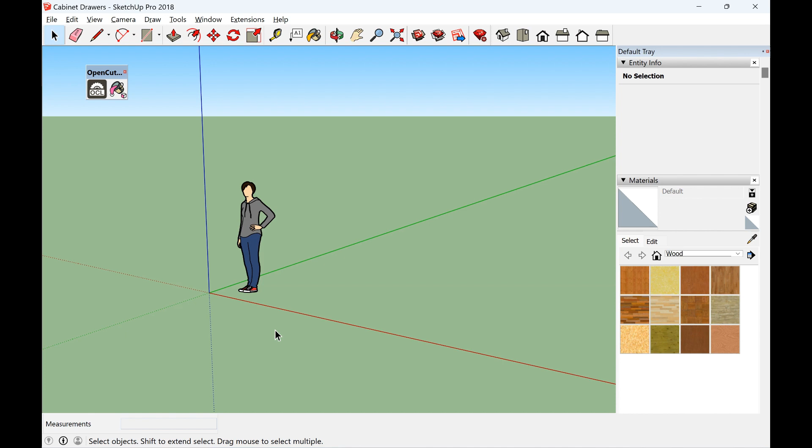Okay, so first of all, you're going to open up yourself a new file and save it, which I've already done. Then we come with the obligatory human. We'll get rid of her or him, whatever they are.

Now, I'm going to start off with building my carcass. So I'm going to start off with the base. So I'm going to select the rectangle tool and put it on here. Draw it out.

Now, all I have to do is plug in the dimensions that I actually want. So I want this thing to be overall 570 wide and 450 deep, but I've got a 12mm backing board going on the back, so I have to deduct 12mm off of that, so it's going to be 438. So we're going to say, because it's in meters, we're going to say 0.57 comma 0.438.

Okay, so that's our base. Now what we're going to do is select the surface, extrude it, just click on there and you can drag it up and down, and then you're going to type in the actual distance you want. So this is a 18mm piece of MDF, so it's going to be 0.018 thick.

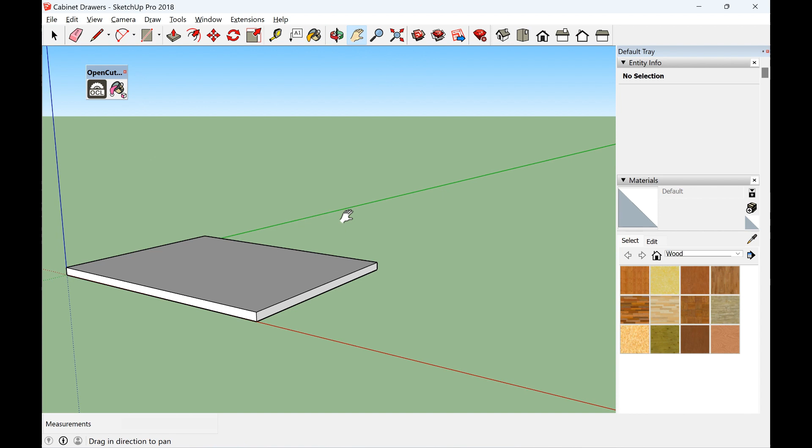Now comes the clever part, and I strongly advise you build all your models like this from the get-go. It just makes life so much easier, is to build things into components and groups, and that way you can just copy and paste things from different projects within the project. So I'm going to select that entire thing, and I'm going to right click, make component. So I'm going to call it carcass base.

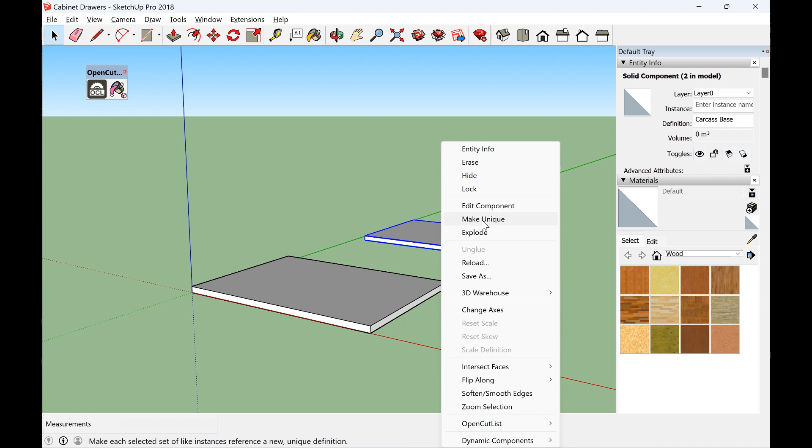Now what I want to do is make a copy of that for the lid, for the top. So we're going to copy, Control C, paste, Control V. Okay, but now I want to make that unique. Make unique. That means now it's not only is it not a copy of this, but it's also not a component. So now we can create a new component, but to make a component we have to explode it first, then we can make a component, and we're going to make that carcass top.

Okay, that's good. Right, now we want to make our side panels. So let's just get ourselves in the right view. Now, this is a good little bar. If you right click up here, you've got all the menus up here, and I use the views bar, which is really handy. Just make sure you click the right one.

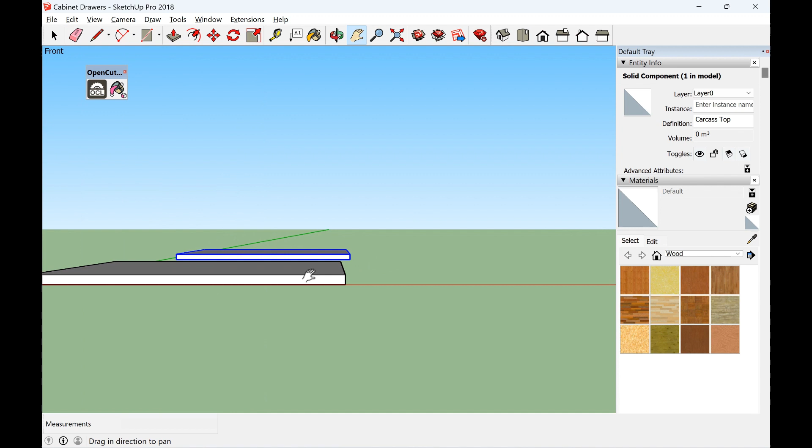Okay, so that's good. It just makes life easier, otherwise the computer may end up grabbing or putting you in the wrong plane. So I just want to draw my rectangle vertical now. And what I'm going to do is just hover over the corner point there and very gently try and keep it in a straight line, drag along, and you probably can't see it, but there's a very faint dotted line there, and what that means is it's pinning itself to that corner so that you stay in the right plane. Otherwise it might end up drawing it somewhere miles off in the distance. Okay, so I'm just going to start there and draw it out.

Now this one needs to be 650 high and 450 wide. So again, we're losing the 12mm on the back, so it's going to be 438, and the height I've got to deduct the two 18mm pieces of MDF, so I'm going to deduct 36mm off of that. So we've got 614 by 438.

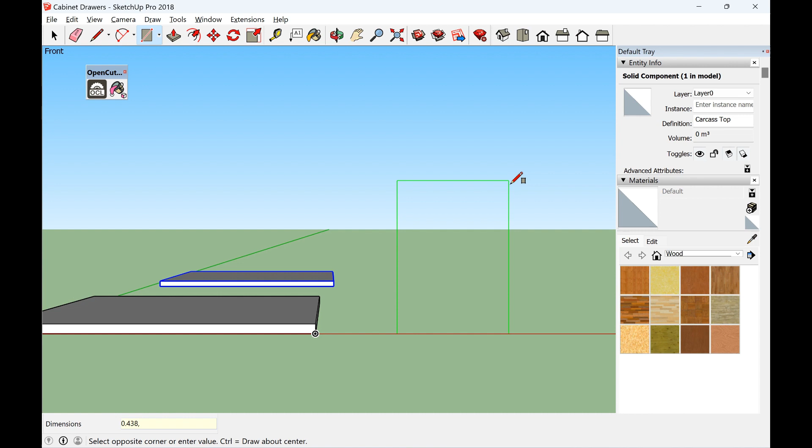614. Okay, that's good.

Select that, extrude 0.018. You can double click it to select it, or highlight it with the select tool. Then we're going to make a component, and we'll call that carcass side. Now, I'm not too bothered about making a separate one for the right hand or left, I'm just going to copy another one in there.

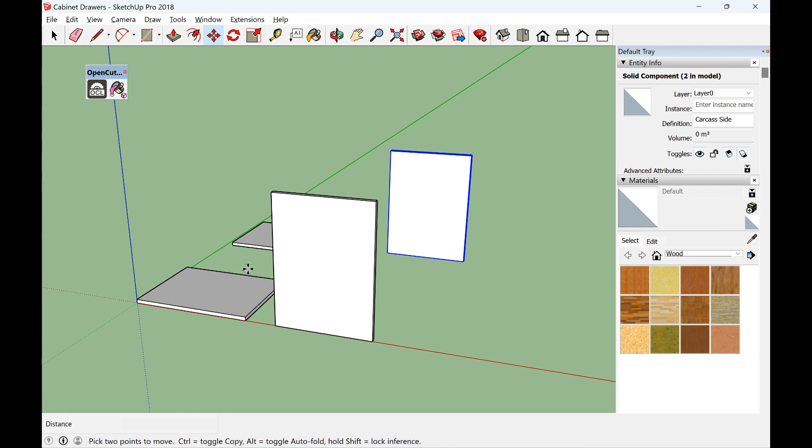Good, now we can assemble it. The way to do this is you're going to grab one of these pieces. I'm going to click the corner.

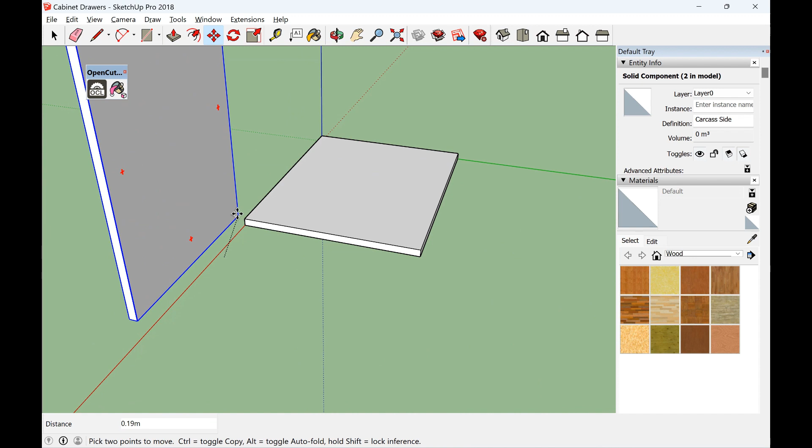Let's move it out of the way for a sec. I think we're going to rotate it first, that's probably the easiest thing. So click the rotate tool. Now you need to, as you hover your mouse around, you see it changes planes all the time, so we want the blue one because we want it in the flat plane. I'm going to click on the corner there, draw a line out parallel to the unit, and then swing it round to 90 degrees and it will snap on the 90 degrees. You see where it goes green, that means it snapped on the 90.

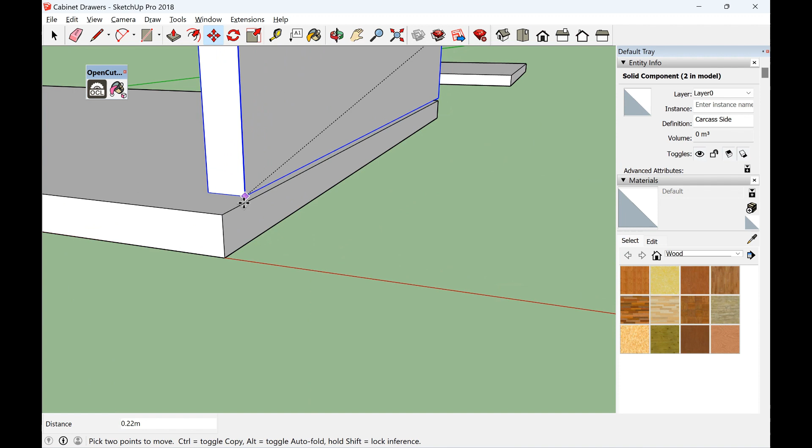Okay, now this makes it a lot easier to place onto the other unit. So we're going to scroll around, get our move tool, grab the corner, zoom in and pin it to this corner. Okay, and then we're going to do this one.

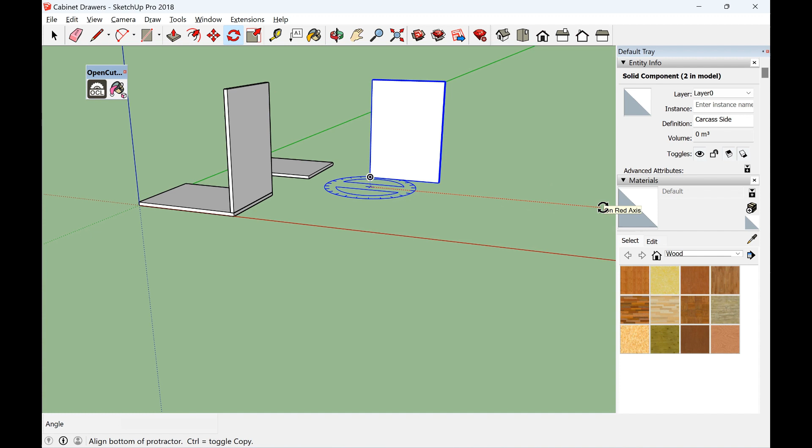I find if you just hover over and then just pull it down slightly, you get the blue one. Doesn't actually matter, it's not on the unit. So there we go, snap to the 90. There's several ways of doing this.

Just going to rotate that around so we can see more easily. Then we're going to get the grab tool, grab the corner. There you go. And then we're going to grab the top, the lid, and pop that on top there. Okay, so that's our box.

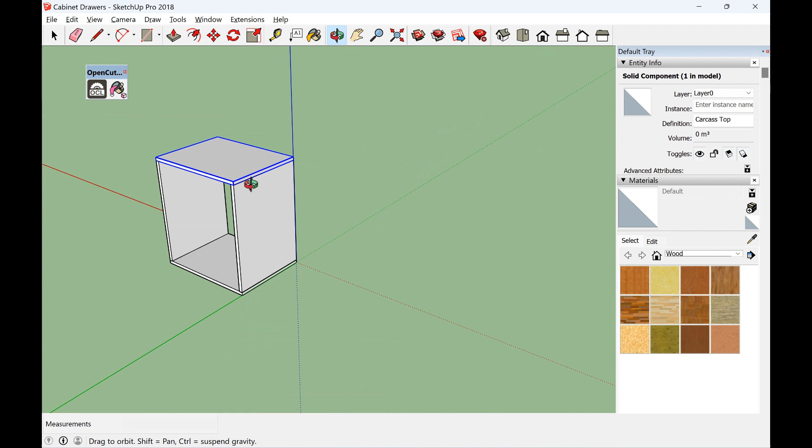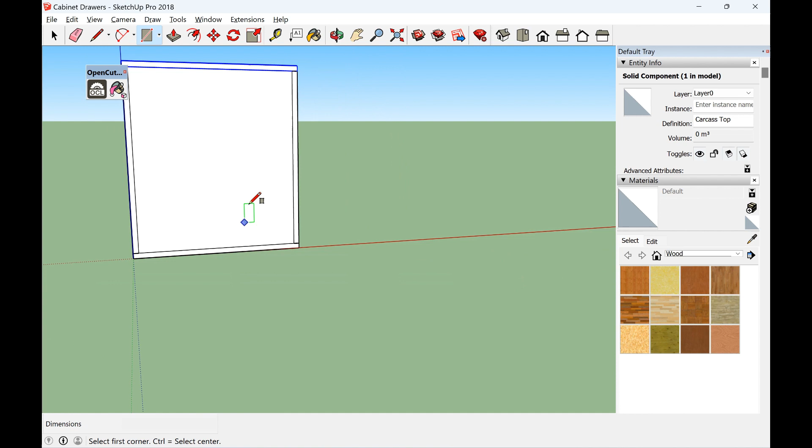We need the back for it now, the 12mm back. Now you could just draw yourself a separate 12mm back, but I'm going to show you another way to do it. So we're just going to come to the back here and draw a rectangle on here. Make sure you click the right one, you may have to zoom in. Okay, there we go. So now we want to extrude that out.

0.012, 12mm. But you must create a component now, because otherwise this is glued essentially to the main carcass, and then it will end up pulling it in different directions, so you don't want to do that. So just click it several times, right click, make component: carcass back.

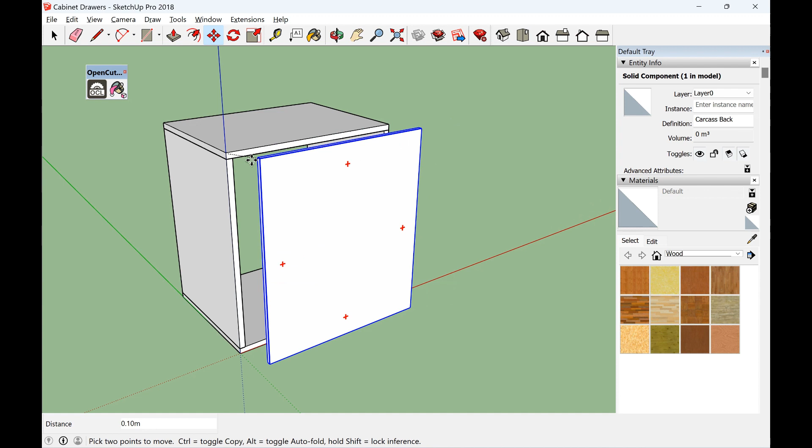Okay, so now if I want to, I can move it. If I hadn't done that, created a separate component, it would be dragging parts of this thing off in all sorts of directions. So you don't want to do that, so let's just escape that and leave that. So that's our carcass now.

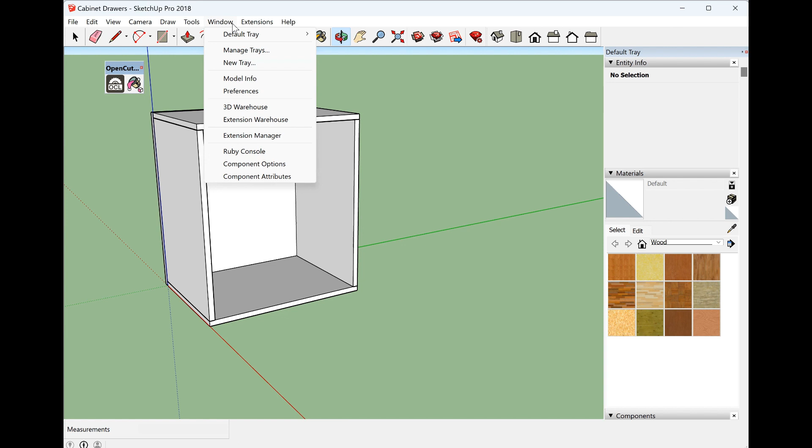Okay, I thought now would be a good time to show you how to change the precision of the dimensions, because it's becoming a bit of a pain now for me. So we had it set like this. If we take it to one extra decimal place, we'll now get all the millimeters. So that's under Window, Model Info.

Okay, so now, before we decide on what drawer runners to get, we need to measure the depth of the unit. So we're actually getting now 420, 420 millimeters. So we need to find something that's that or less.

Okay, so let's go online now and see what's available. Now, before we decide on which drawer runners to get, we have to make sure we get the right length. Now, they don't come in very specific derivations, they'll usually be 100mm lengths, or maybe 50mm half lengths of that. So it might be 350, 400, 450, something like that. And because we've got a length of 420, we're going to be looking at a 400mm length, as long as you can get in that space.

Now, these ones are the creme de la creme, really, of the drawer runner world. They are soft close and ball bearing. You don't have to have soft close, or self-closing, as well as another feature. I do tend to find with these, if you're cutting a lot of MDF dust, you must keep it clear of these, otherwise it really affects the ball bearings. So you've got to keep them super clean. So they are a little bit finicky, but definitely the best quality.

Okay, now let's have a look at these undermounted ones, so you don't have to have them on the side of the drawer. They could be mounted on the base.

Then we have some very basic ones. You can get them even cheaper than this. They don't have soft closes, but they are metal ball bearing runners. They run on the sides of the drawers.

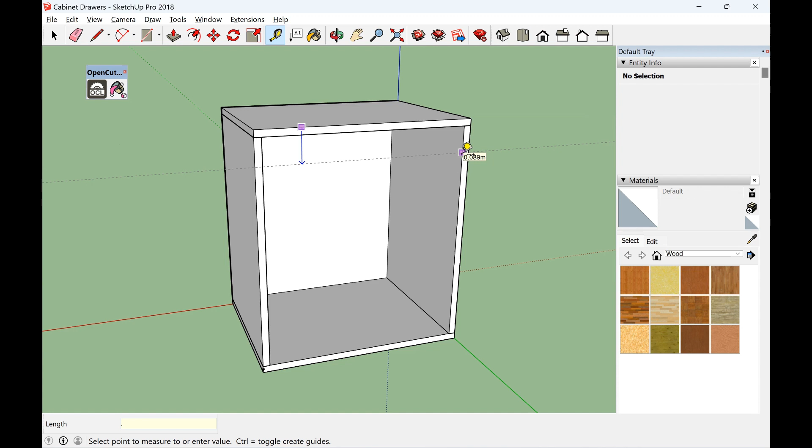I'm going to type in 0.01, and that will do my first guideline, and then one at the bottom, 0.01.

Now there is a function in here that allows you to divide up equally between two points, say for 3 drawer fronts, but then I found it difficult to manage to achieve a 5 millimeter gap between the drawer fronts. I can't explain it in too much detail, but it's probably easier for you, especially the first time, to just attempt it this way.

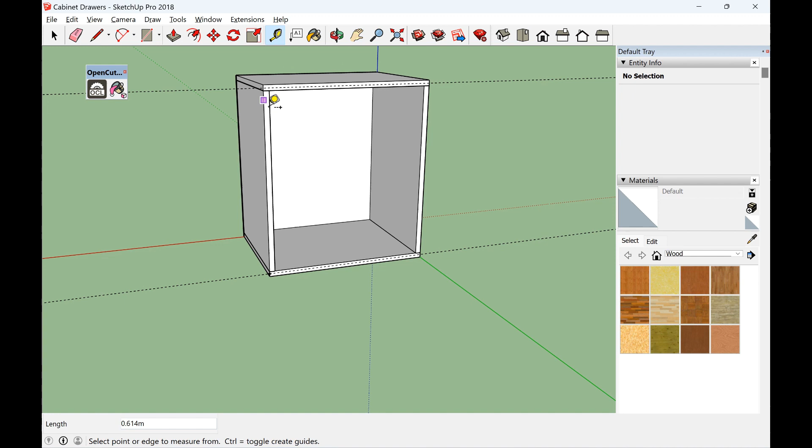So all we're going to do is measure the distance between the two guidelines, which is 630. Now we need to deduct the 5 mil and 5 mil gap between the 3 drawer fronts, so that's 10 mil off of that. That's now 620, but I can't divide that in my head - it'll be about 207 or something. So divide that by 3. Yeah, 207 millimeters.

Let's drop a guideline down, making sure it's again on the surface, 0.207.

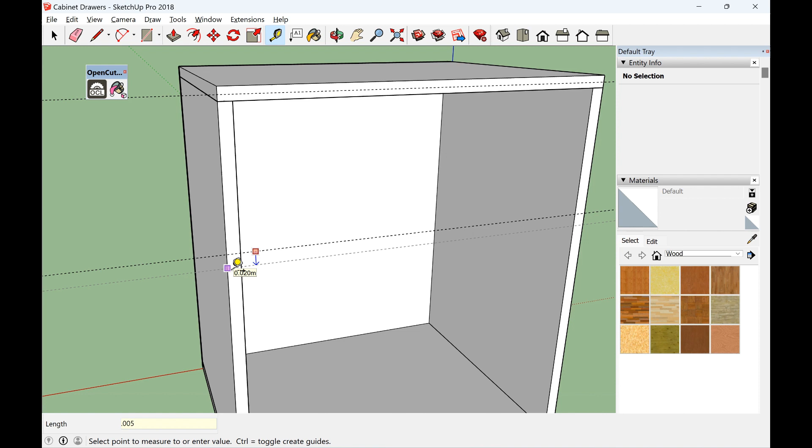Now I'm going to create my 5 mil gap between this drawer front and the next one. Always have to make sure you're grabbing the right thing. 0.005. Then let's drop that down another 0.207. Move down. 0.005.

Okay, so now the critical thing is whether or not this is actually 207 or close to it. So it's 206, that's because we lost a little bit - it wasn't quite 207, but I can live with that, 1 millimeter difference.

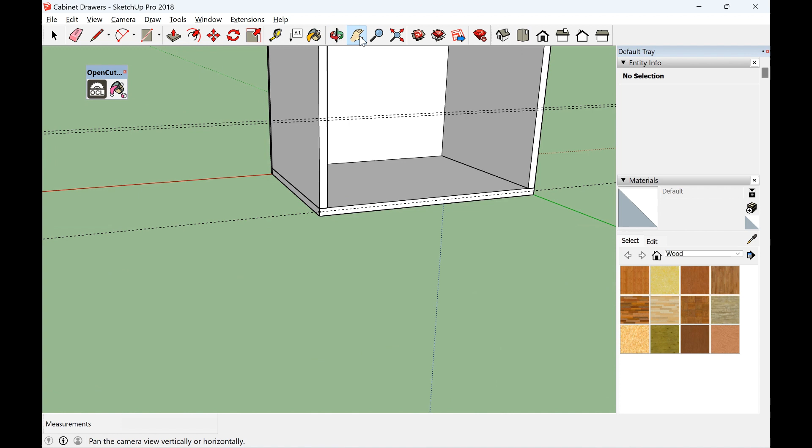Now what I want to do is, I think what looks quite nice - the 5 millimeter gap is good. That's small enough that it looks nice and clean, but also gives a big enough gap that the drawer fronts are not likely to rub on each other if they're slightly out of line. And some of that we've taken up with paint anyway.

And on the sides, I think 3 millimeters is a nice offset. So we've got to somehow grab the side and put in 0.003, and then this side, 0.003. Nope, didn't quite do it.

0.003. Has it done it? It's not - this is the thing, you've got to make sure that it's actually grabbing the right part. So I'm going to turn this around this way. It's gone inside the unit.

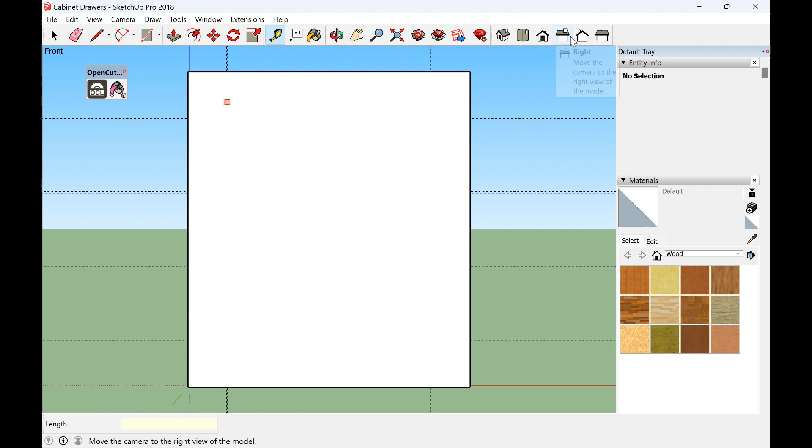Okay, that's on the surface, 0.003. Okay, there we go, that's better. All right, let's look at the front of it. Yeah, okay, so now I'm going to be able to draw my drawer front. Make sure it's grabbed the right part.

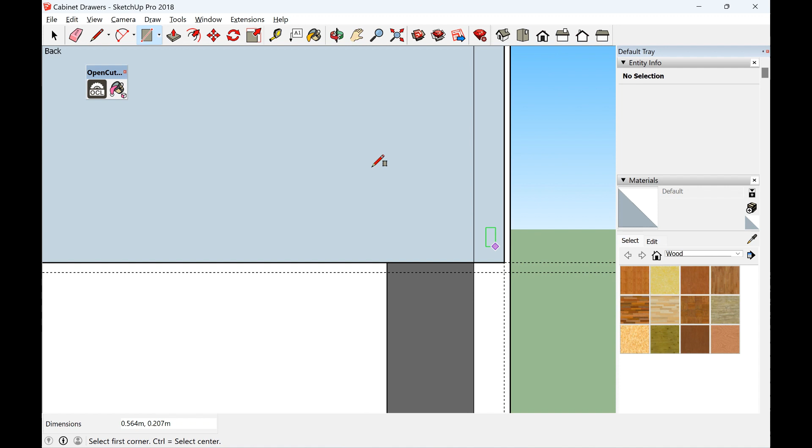Move it over. Go back to the rectangle tool. So now we've created our drawer front. Click on it, rotate, so we can see what we're doing.

Extrude - it's going to be an 18mm bit of ply again, 0.018. And then we want to create that as a drawer front, as a component. So this is going to be drawer front. And then it's probably just easier to go now down to your components and grab the drawer front. Not Stacy - right, drawer front.

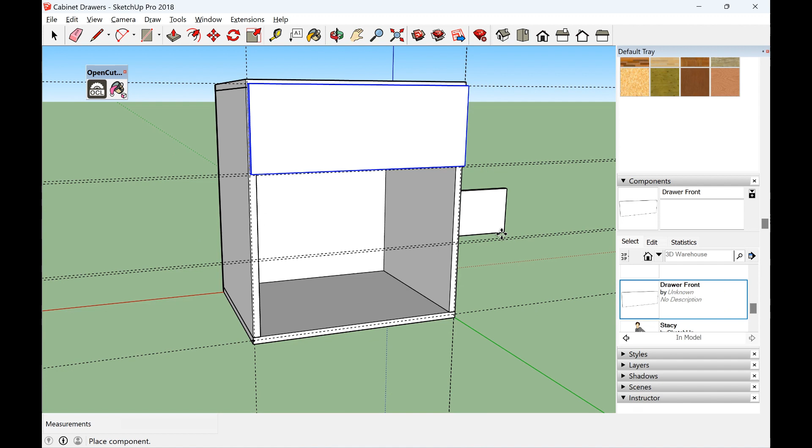Okay, I need to see where it's grabbing it. So I just put it in place and then we're going to position it up. So it's still selected - let's grab the corner and put the corner right there.

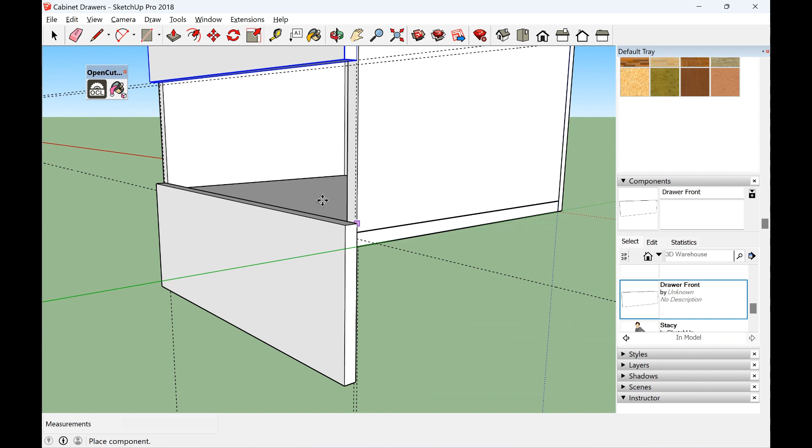Okay, another one. Grab the corner, zoom in, make sure it's on the right point. And there we go. Those are our drawer fronts.

So let's group those together, which means we can move them all out at once. No, just keep it on that line, just makes it easier when you put it back.

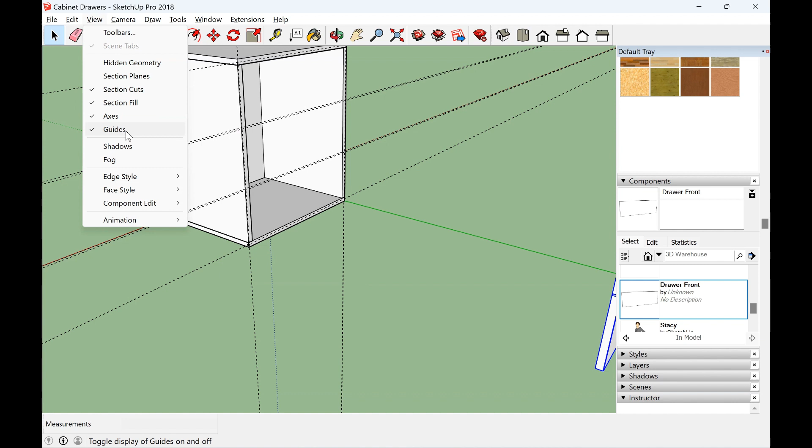Now I want to hide the guidelines, so just go to View, scroll down and you see Guides. So I've hidden that now - so they're still there, but they're just hidden. Let's also make a group for this carcass. Make a group.

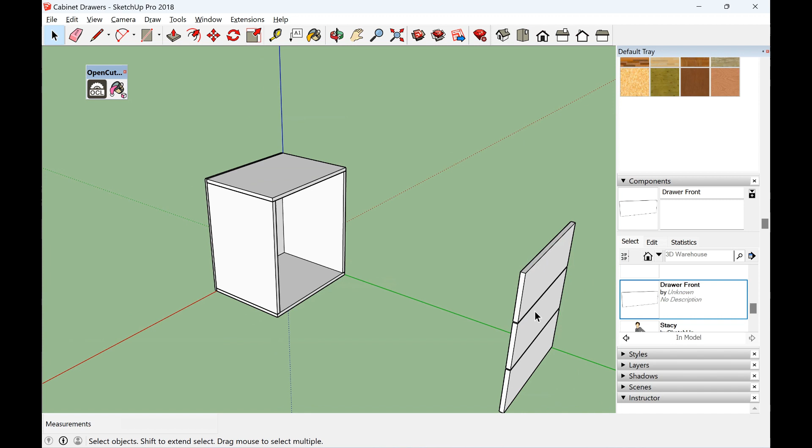Okay, so now we can start building the drawer boxes. Before we go any further, I have actually made a slight mistake, but it will be a learning process for you guys. So you know how I said that I wanted to draw my drawer fronts on the front there?

Well, that's because they're going to stop on the face of the unit, and I didn't allow for that 18mm in the depth of my overall unit. So now it's 18mm too big.

But that's fine - you're going to learn now how to reduce the size of a component if you've made it too big. And just one point about making the drawer fronts finish on the face of this unit: it gives it a nice positive stop. You can't really go wrong with it.

If you start trying to do inset drawer fronts, it's a lot more work because you have to make sure it all lines up perfectly. I certainly would suggest for your first project you keep it simple like this. And to be honest, I want to do this project as quickly as I can, so I don't want to get involved in that. And I'm happy with the look of the drawer fronts finishing on the face.

So how do we do this? Right, let's zoom in, move it over.

Now the only downside to having all individual components, which helps you with producing a cutting list later rather than making one big box, the downside is that you then have to go through each one and make it smaller, but it's not an awful lot of work.

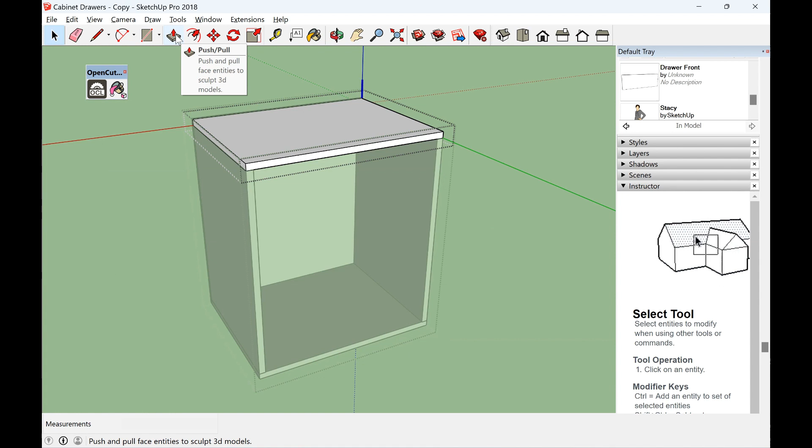So just click several times until you've isolated the individual part. Now we're going to extrude it in reverse. And even though down the bottom here it says distance, it said minus point whatever, you're actually going to type in a positive one, so 0.018. I know it doesn't make any sense because you want to go in that direction anyway, but it does work.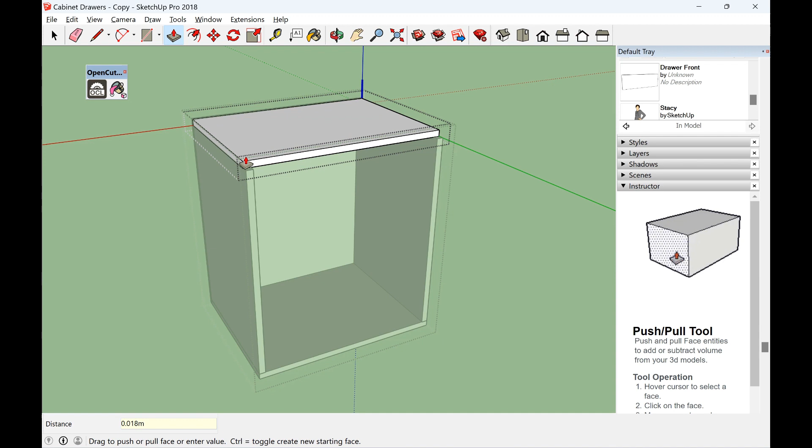Okay, so in hindsight now, maybe I shouldn't have made the top and bottom different - I could have affected both of them with that. So that's what I'll suggest to you, make them the same.

Haven't quite got it yet, there we go. 0.018, so that's the thickness of the drawer front we're removing. But the sides should move back together - there we go, because they're the same item.

Now what you can do, rather than type in, you can snap to the face of the unit. There we go - so let's just double check that.

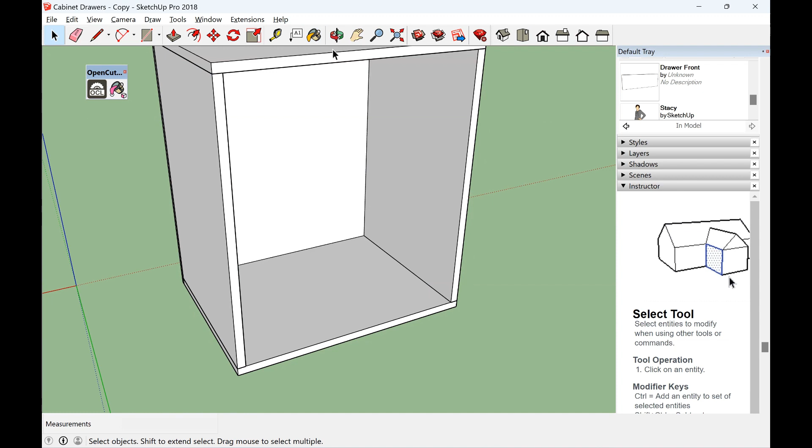So this plus 18mm should make 450, which is what it does. Perfect, okay, let's save that.

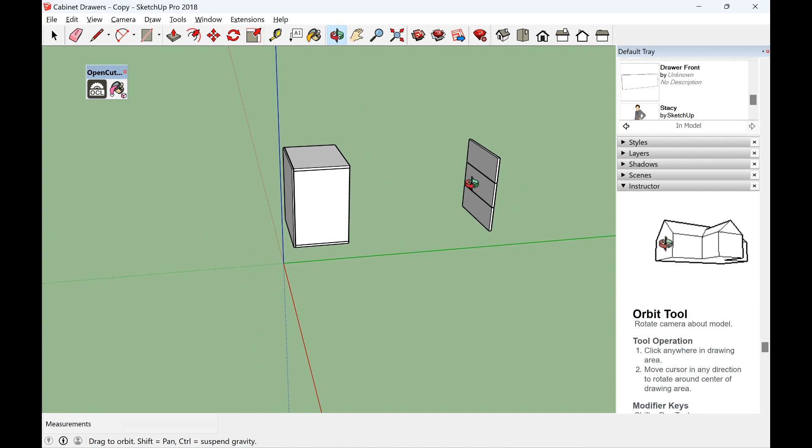Right, now we come to the complicated part. Drawers are actually pretty complicated for what they are when you're designing them from scratch. They look simple, it's just a couple of drawer runners on the side, but to make them all line up, you've got to do a lot of planning to make sure it all works, otherwise you'll get binding drawers and it just won't work.

So let's start off with this bottom one. What I'm going to do is work out what the width of my drawer is going to be overall. So let's go back to the unit, just to double check our dimension: 534, as I said.

Now my drawer runners, I'll show you now, are 12.7mm - we saw that in the ad anyway. So 12.7mm. What you want to do is allow 1mm wiggle room either side, so that'll make it 13.7, round it up to 14, double that, 28mm. So we've got to take 28mm off of the width of that opening, so 534.

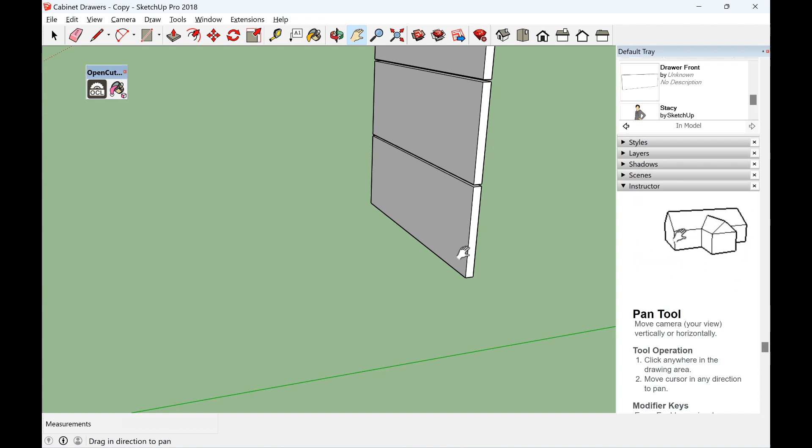So 534 minus 28 is 506. But we can do it in from the edge of this unit. This unit is 15mm overlapping on the edge of the unit. If my maths is correct, so we want to come in 15mm plus the 14mm, so 29mm, and that will give us the outermost face of the drawer box: 0.029. So that's taken into account the amount of overlay on the side of the unit and the thickness of the drawer runner with a little wiggle room.

So then we do the same on the other side: 0.029.

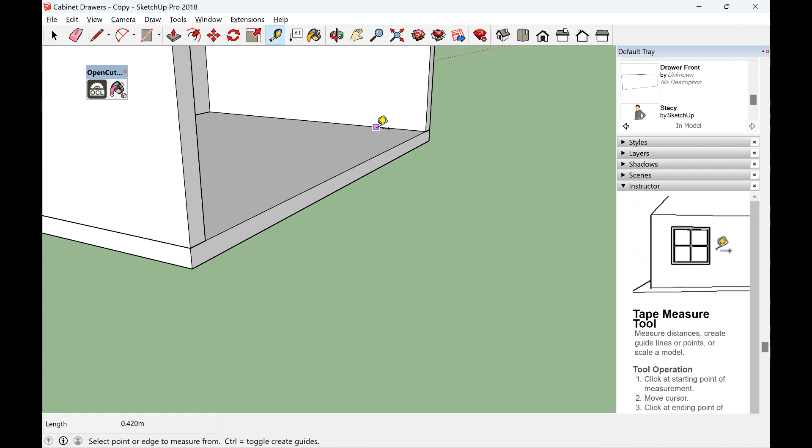Now from the bottom, I want the drawer runners to start 10mm - I'm trying to get it as low as possible, but I give myself a bit of wiggle room. I'm going to start them 10mm from the bottom of the carcass. So if we go back to the carcass, I want it starting - the bottom of the drawer runner and the drawer 10mm from there, from the base.

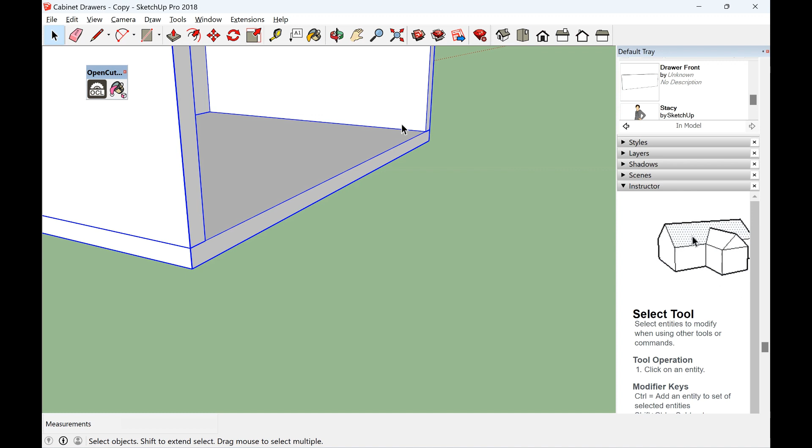But also we've got to work out off of where the drawer front sits, which we said is going to be 10mm off of the floor, so it's going to be 8mm to that lip there. So 8mm plus the 10 is 18. So let's do a guideline of 18: 0.018. So that's going to be the base of our drawer.

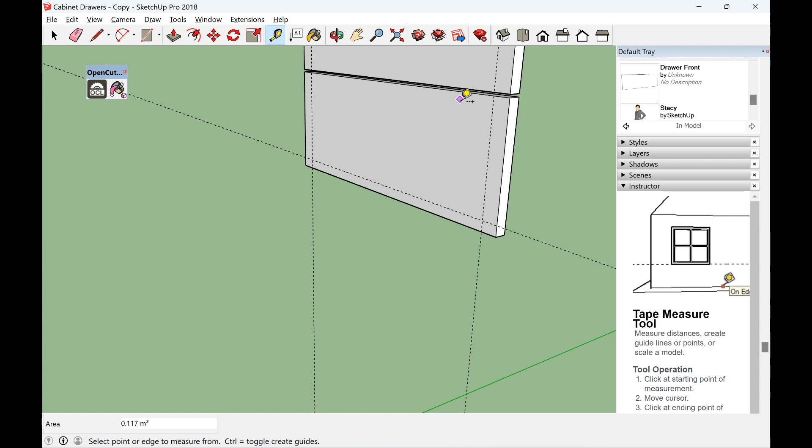Now from the top, I really want to maximise the depth of these drawers. That's one of the big reasons why I'm building the drawers, because you can never seem to get deep drawers these days - they're always really shallow and stuff falls out of them. So I'm going to go for - I know my drawer runner is going to also sit, let's just mark the other 18mm on. And we know where the base of our next drawer is coming.

That's obviously the wrong part of the drawer, just have to rotate it a little bit. And it's clicked on the wrong thing again - you've got to be so careful with this, it pays to zoom right in. There we go.

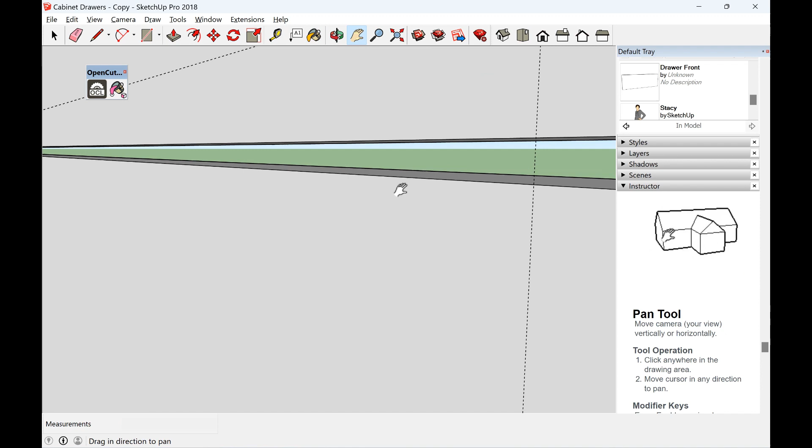So let's make that 0.018, so it's identical to the one below. Now I know that my drawer run is going to start way up here, so I've got plenty of room, but I'm not going to take the drawer all the way to the top, just for aesthetics. I'm going to drop it down, and make it 15 mil down. Okay, so that is the externals of my drawer.

Now if you look at most drawers, they usually have the side panels longer. So the side panels that extend front to back are longer and cover the edges of the front and back panel. The reason being, well one of the positives is that if you imagine you're going to screw it or nail it from the side, therefore you're going to be pulling across the screw.

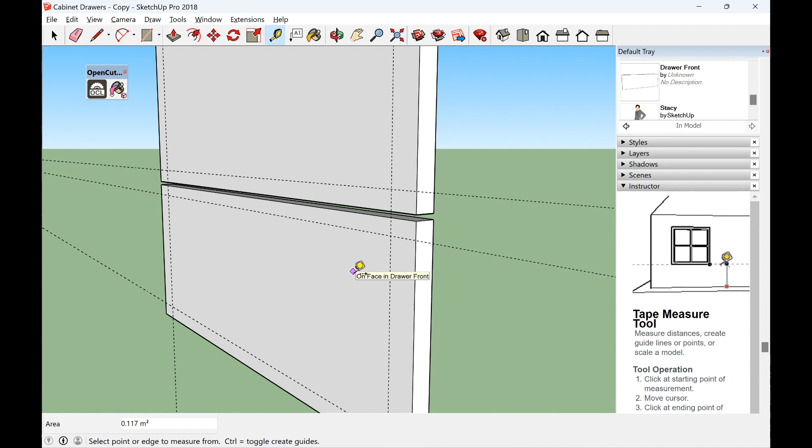The particular problem here is because you're going into MDF, and if you're constantly tugging on that, you could easily wear it out eventually and pull the screw out. So it's always better screwing from the side when you're doing it on a drawer. The other reason is that you're going to hide the end grain of the front and back pieces.

Now the other question is, do you just use 3 sides to a draw box and then stick the draw front on? Because now you're losing another 18 mil, you're making a 4-sided draw box and then sticking the draw front on. But it is so much easier to assemble, and 90% of drawers out there you'll see will be like that. So I would advise you to build the draw box.

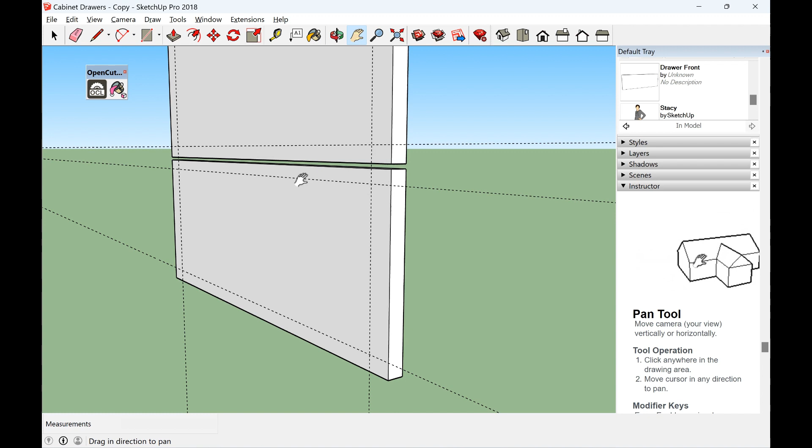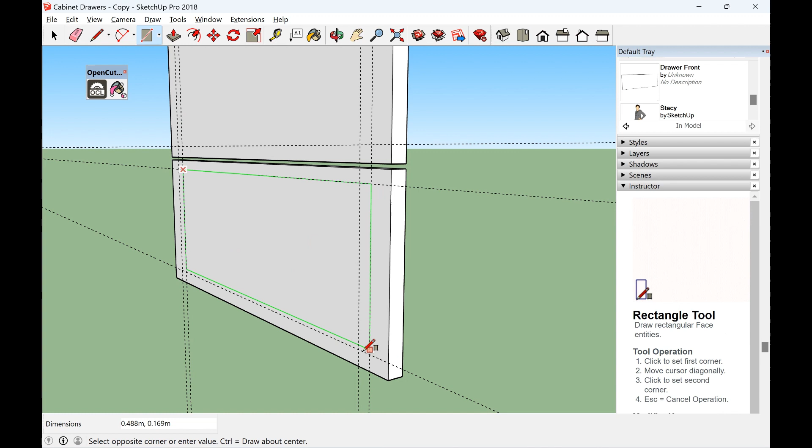Again, if it's your first attempt, just build a draw box and then attach the draw front to it. So what that means is we need to bring another guideline over at 0.018, and again another 0.018. That's going to be the sides of our unit. So let's use these guidelines now and draw the front of our draw box, and then we're going to extrude it 0.018.

Now let's make that a component. You make that drawer box front or back. Great.

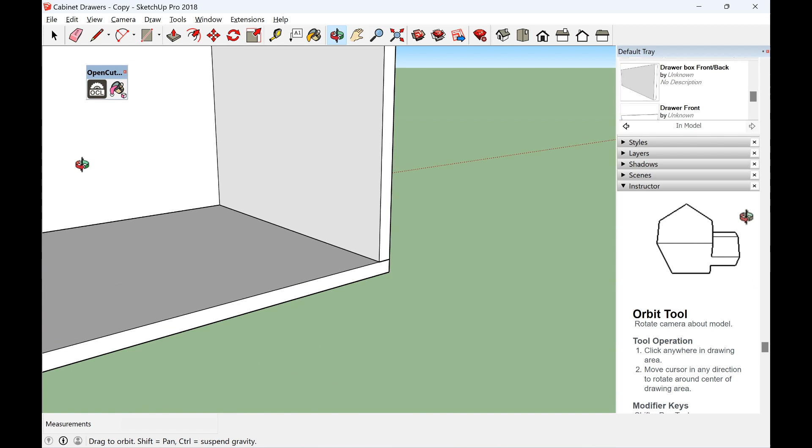Now the depth of the draw unit, the draw box, it could be the full depth, but you don't know how accurate - it's highly unlikely you're going to build it exactly accurate. Even someone like me, I'm going to struggle to build it 100% accurate. So I'm going to allow myself 10 millimeters at the back. Our depth is currently 420, so I'm going to make it 410.

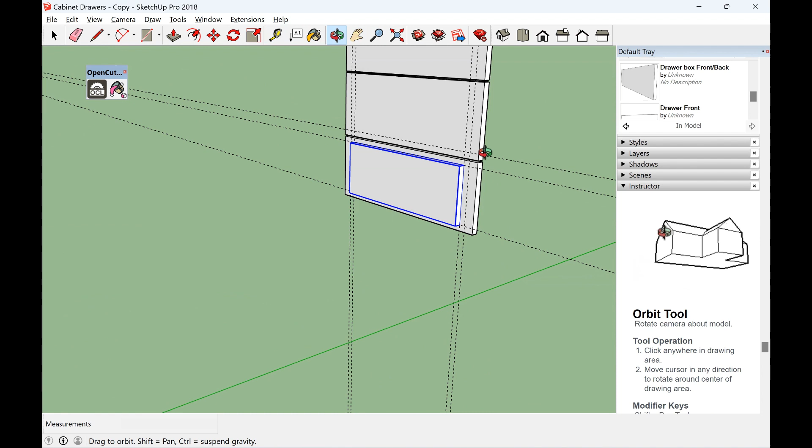And I can extrude that. More than one way to skin a cat - I'm just going to do it this way myself. And then we extrude that 0.41. Enter. Right, there we go.

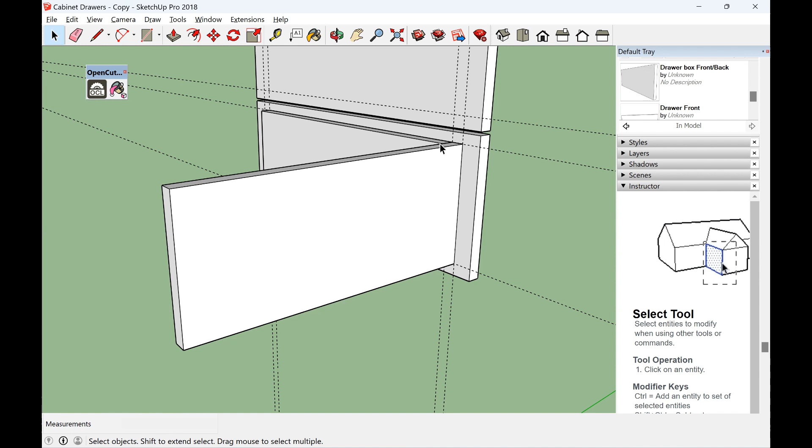That's the drawer side. You see there, it's hiding the end grain of that front panel. And if you had a screw in there and you're pulling the draw that way, you're pulling across the screw in shear strength rather than pulling against the screw. I mean, screws are strong, but eventually, especially in MDF, they can become weak, and if you keep tugging on it really hard, you'd end up pulling it off.

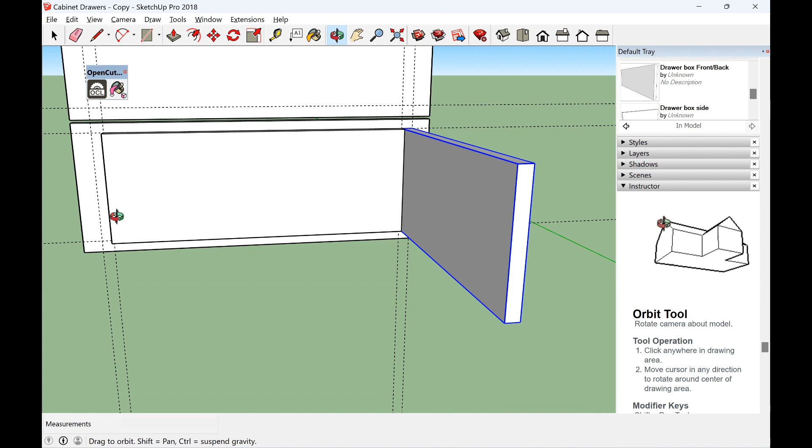So that's what my mum said anyway. Right, let's make this a component - drawer box side. Rotate around. Then we can go to our components.

Just a little note about components: if they're not here, just click on this little arrow and go to in model. Sometimes there'll be all the generic components from elsewhere, but I want my drawer box side. There we go. And I can place that right there. And then drawer box front and back. Done. Okay, so that's our drawer box.

But what we're going to do about the base - now this is where it also gets a little bit complicated. You need to decide what use is intended for this drawer, how much weight you're going to be putting in it, and what materials you're going to use. Now I'm using MDF. MDF has got lots of pros and cons, but the pros are it's cheap, and I've got some in my garage that I want to use up. So if you're using ply, it's much stronger - you can get away with much thinner stuff, and this really dictates what you do with your base.

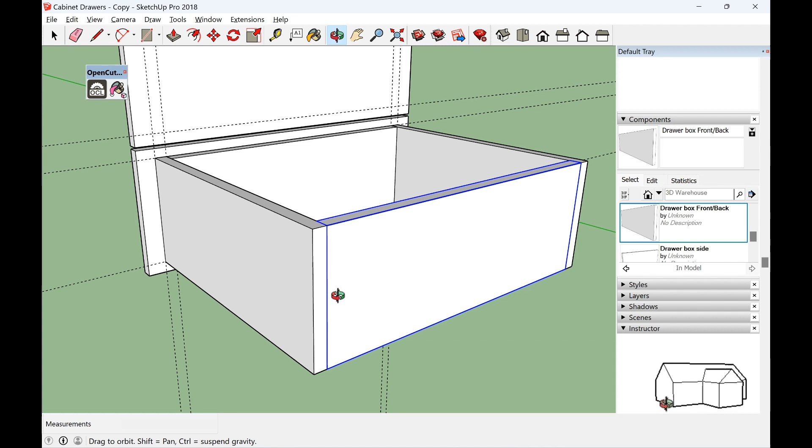So with the base, you have a choice - you can mix it up. You can have a plywood base and an MDF box, or the other way around. But in my case, I think I'm going to end up going with a 9mm ply. But you have to decide if you're going to groove it in - most drawers have a groove inside here. I'm going to show you my existing drawer.

So here we have a typical drawer - you can see it's made from a box with a drawer front fixed to it. And I just wanted you to take a look at the base here. This has only got 4mm ply in it, and you can see when I press it, there's not a lot of give, but it does move.

You can see it like that. Yeah, a little bit of movement in there. So you can imagine 9mm is going to be really strong.

And that is routed into the sides. Funny enough, it's not routed at the back, but it's routed into the sides and the front. So that's going to be really strong. If it was tacked to the bottom, it would really be a lot less strong, a lot weaker. And they've tacked it in with nails and glue probably.

Okay, so that's that. Then we've got our runners, which I bought. And like I say, the distance across there, from there to there, is 12.7mm. But there is actually a little bit of play in this, you can see that. So we allow a mil, that should be fine. So you've got 2mm overall.

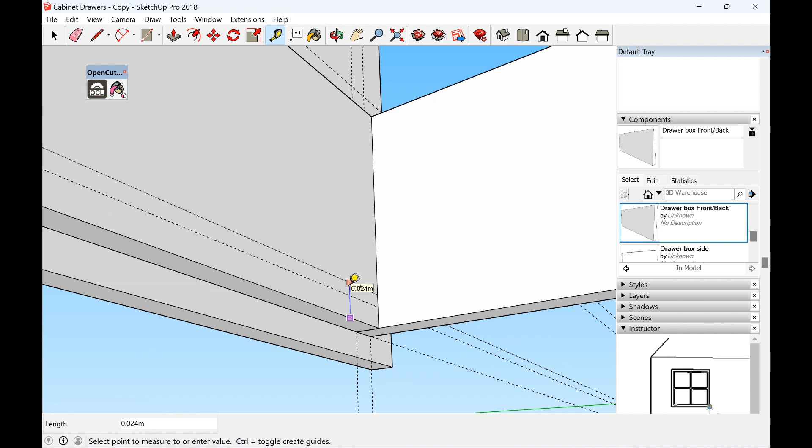0.015. That's before my groove even starts. And then I've got another, let's say the thickness of the base is 9mm, 0.009. So now I've lost a total of 24mm. Whereas if I put it on the base, I lose a total of 9mm.

So that's the argument for and against. If you are going to go for a groove, go for a groove, baby. I would say if it's MDF, it should be at least 6mm up to 12mm and glued all the way around in the groove. If it's plywood, you can go from say 4 up to 9mm, and it'll be pretty strong. Again, it really depends how much weight you're putting in it. If you're putting it to the base, it should be 12mm if it's MDF, if you're going to fix it to the base here, and 9mm if it's ply, if you're just going to screw and glue it.

Luckily, there is a tool we can use to calculate roughly what thickness of material we need. And that tool is called the Sagulator. It is brilliant, this thing. I'll post a link. So what I've done is, because I've got some 9mm plywood down the garage, that's what I've put in here, 9mm.

Is it fixed to all sides? Well, it's not supported underneath like a supported bridge, but it is screwed and will be screwed and glued. So in my example, it's going to be fixed.

The shelf load, I'm going to assume each drawer needs to take 10 kilos. It's quite a lot, but I'm going to assume that. So since my unit is approximately 600 wide, it's 570, but approximately 600 wide, I'm going to say that's 5 kilos per foot, and it's a uniform load, and it's in kilograms, right? So 5 kilos per foot. So it's actually more than I'm probably going to load it with.

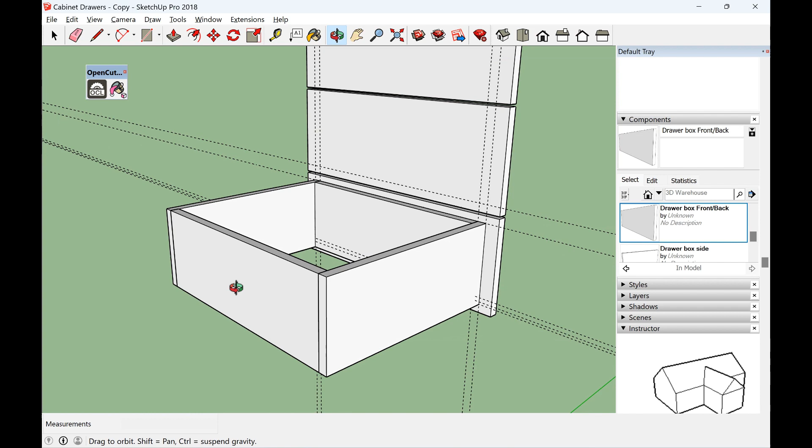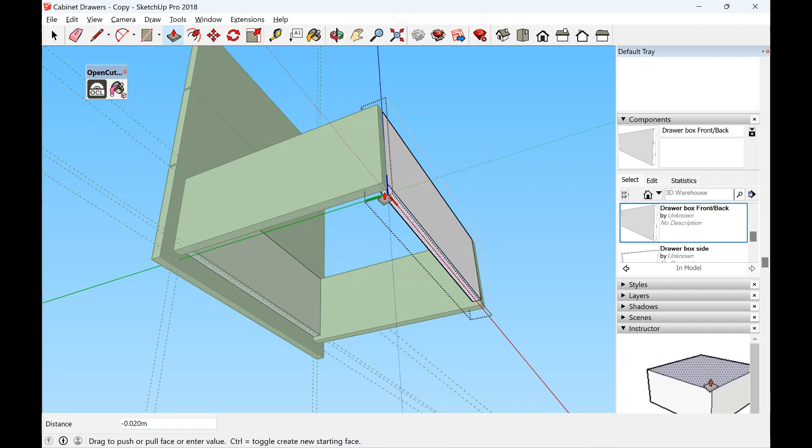So, knowing that I'm going to use 9mm, I now obviously need to make all of this 9mm shorter. So exactly the same thing again. Let's move that up 9mm. 0.009. Done. Okay, let's save all that.

And we now need to create the base. So let's just draw that on. Extrude it. 0.009. And make that a component. We're going to make that drawer, box, base.

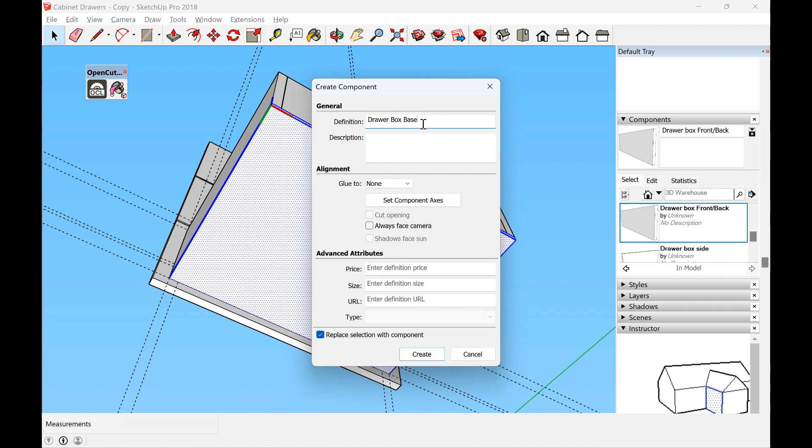Just one final thing to mention about the groove. If you do a groove, if you get into the groove, baby, if you do a groove, make it at least 1 or 2 millimeters wider than the thickness of your board. You have to do this, right? So if it's 9mm, make it 10 or 11mm width. It's going to fill up with glue anyway, but it just makes your life so much easier when you go to assemble it.

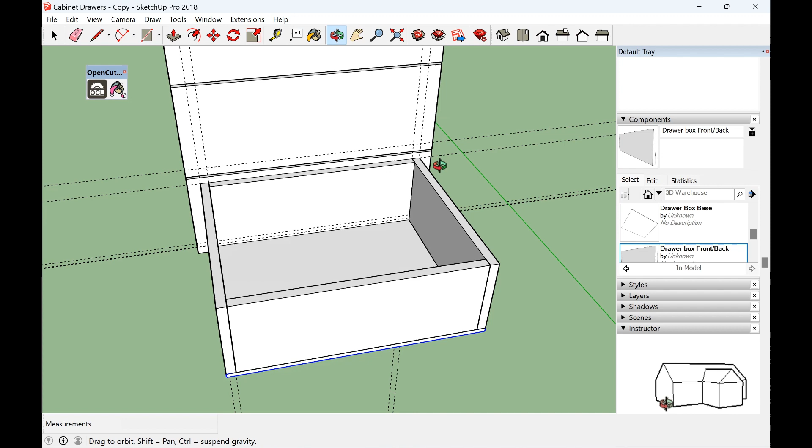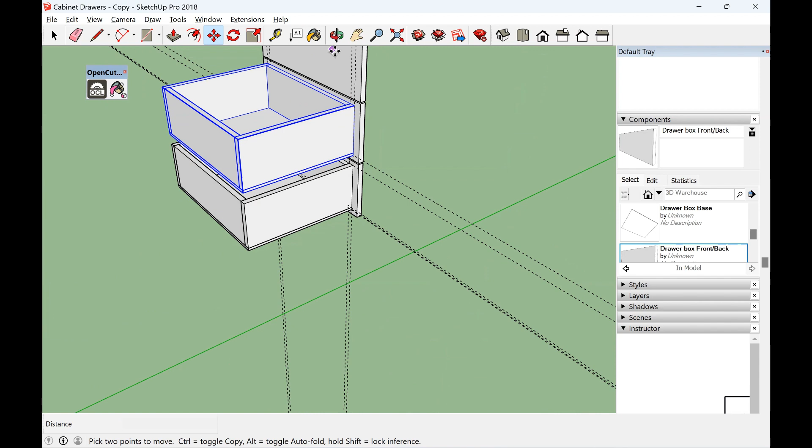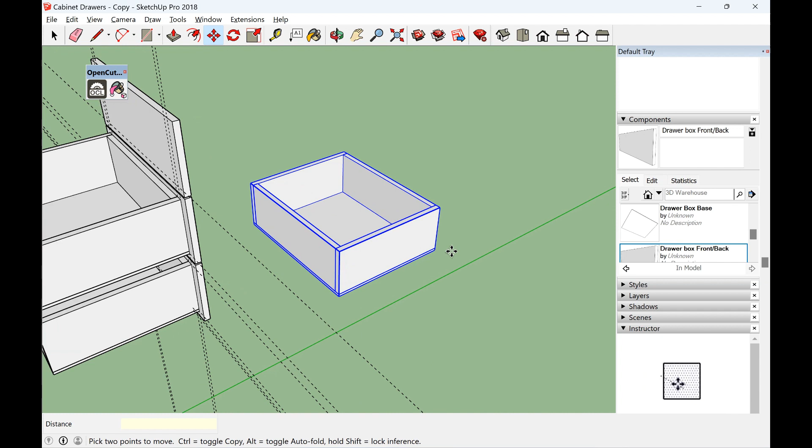Okay, so that now, I want to make that a group. That's now my box. So I'm going to want to copy and paste that. Wrong bit. One. Let's bring that up. 0.018. And grab it in the corner.

And there we have it. I'm not going to put any handles on it or anything like that. It can be sorted out later, but that's basically my model. Let's save that.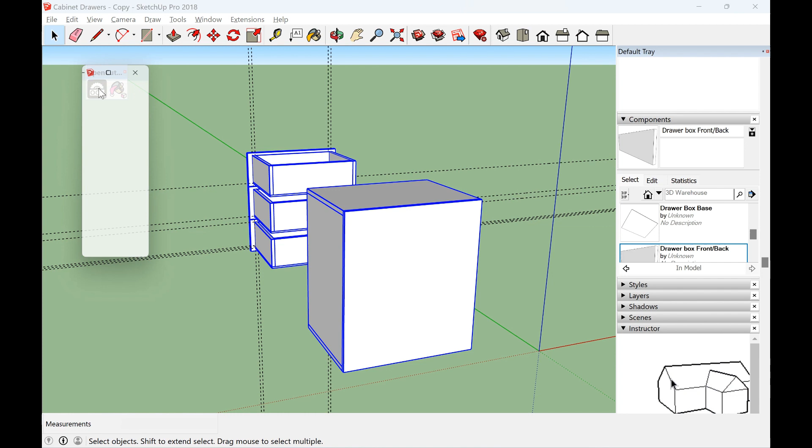Here's where the power of open source plugins really comes into play. I've installed this plugin called Open Cut List, and this is going to help me generate a cutting list from this model with very little work. So first thing you're going to do is just select whatever it is you want to make a cutting list for, and then you're going to click on this and maximize it.

Okay, so we want to make our materials first. The materials would be things like the MDF 2x4, whatever you want to use. So let's start with a new material. And this one I'm going to call, because I've got different thicknesses, MDF 18mm. The color, you can choose a color code. So I want it to be brown, so I've just put in a color code for that. And the type, it's a sheet good. You've got all these different options here.

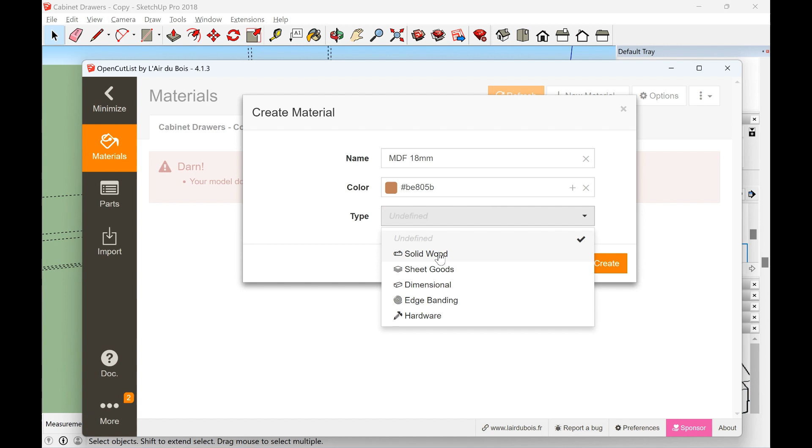There's a great video on YouTube on how to do all this. Length oversize is whether you want it to actually be cut bigger than you want, but I don't want to add any millimeters to the size. So these are your standard sizes. You don't need to do anything here. You just need to check that the size that you want is there. And these are standard sizes, like that's 8x4, that sheet there. Grain follows length. Well, MDF doesn't have grain, so I'm just going to say no grain.

And if I wanted a different one, for example, a different size sheet, let's say I've got an offcut I want to use up, I can put in the exact size of the offcut. So let's say 1020 millimeters times, I don't know, 1850. Just as an option, and then we click create. So now we've got an MDF 18mm material.

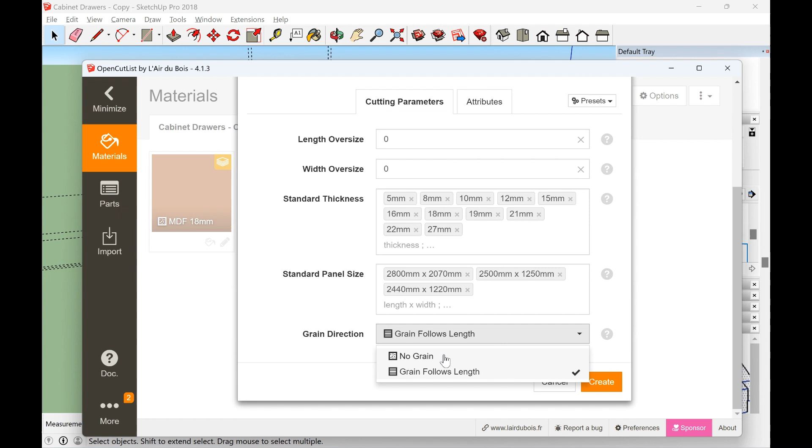Let's create another one. We call it MDF 12mm. Color, same again. Type, sheet goods. And let's just keep a standard sheet, create. Okay, and then we've got our final material, which would be plywood 9mm. That can be the same color.

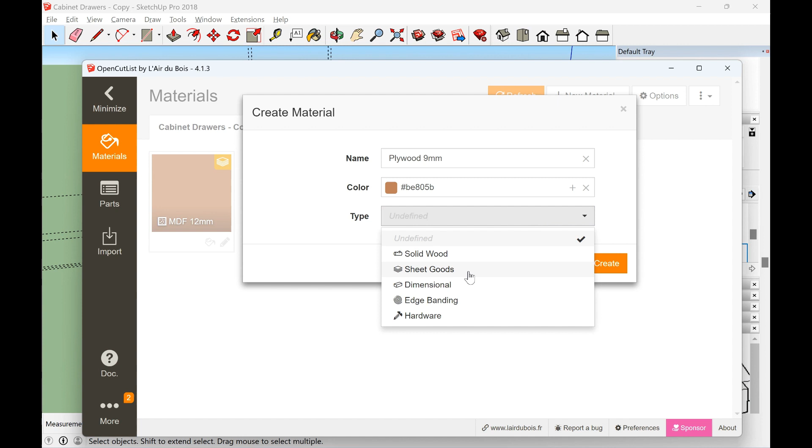Sheet goods. It doesn't have a 9mm there, so let's make one. Let's just leave that as standard. And let's just say it follows the grain. Actually, no - the reason that's important, if you say it follows the grain, it will orientate it so that it's keeping within the grain, but that may not be the most efficient use of material, and to be honest, I don't care which way the grain goes inside my drawer box. So let's leave that like that.

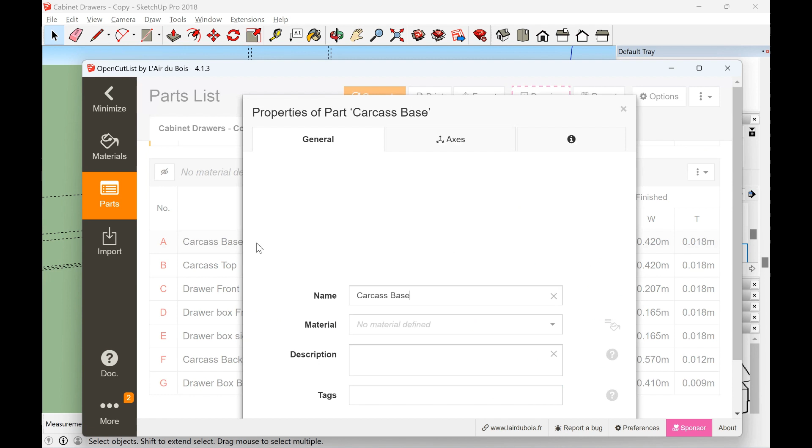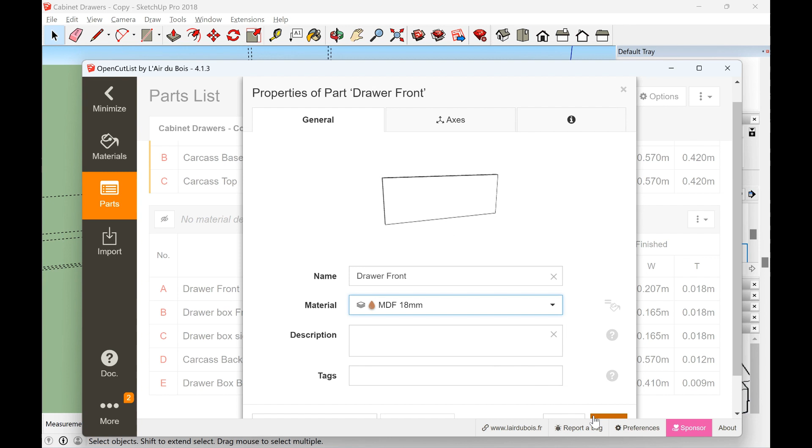So let's go to parts, generate, and you can see it's got all the bits, and what you need to do is go through. My carcass side is 18mm MDF, so check, click the 18mm MDF - you've only got to do this once. Carcass base is also 18mm MDF. So I'm just going to go through these. Oops, wrong one - drawer front back box, 18. Right, the carcass back is 12mm. Drawer box base, 9mm plywood.

Apply - that's done. Okay, so for each of these, you can actually see a cutting diagram for the particular material. So the MDF 12mm, let's look at the cutting diagram. It lets you choose the sizes that you put in before, and then generate. And there you go.

So that's how much 12mm - I'm only going to use one piece of 12mm out of a whole sheet. So obviously that'd be better off out of an offcut. And then you can actually create labels, which is incredible - we'll come to that in a minute. So let's go back. There we go, back. Close. There we go.

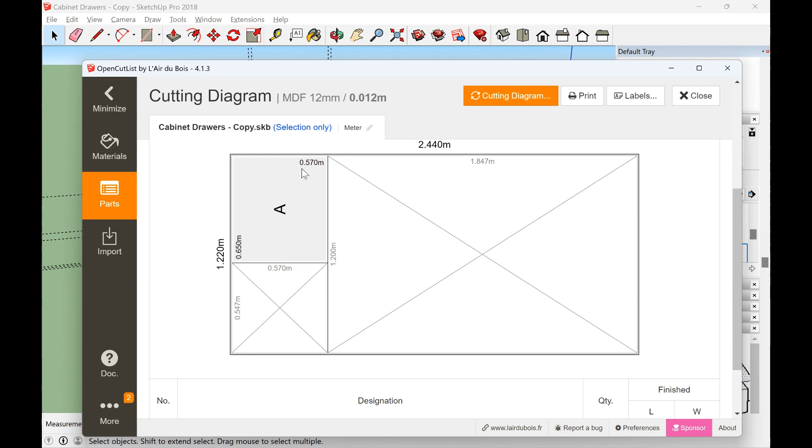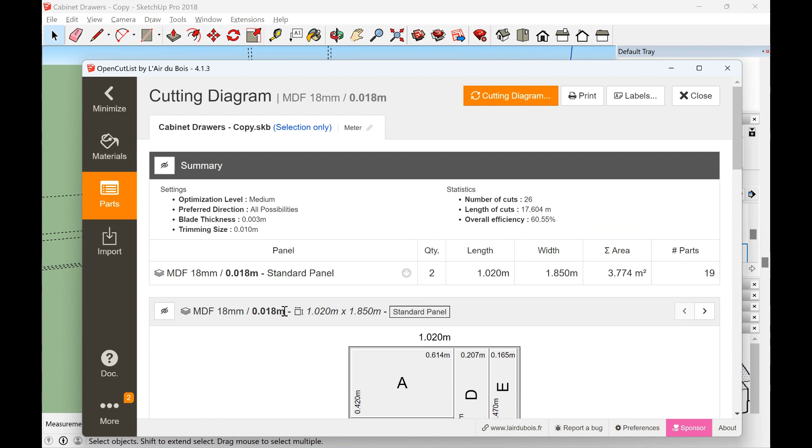Let's go to the 18mm cutting diagram. Let's go for a standard sheet. No, let's go for our offcut - see if it will fit it all in. So it's actually had to use 2 sheets. So let's change that - can we change that? Let's change that to an 8x4. Yep, it's managed to get it all in one sheet.

So probably I'll be better off just getting a brand new sheet of MDF, and you see how it's fitted it all in there? Now, you probably could allow for the thickness of the blade in between each of these sheets, so you'd want to know what that offcut is there, and I'm pretty sure there's a way of figuring that out, but I don't want to go into too much detail now. It's just an amazing plugin.

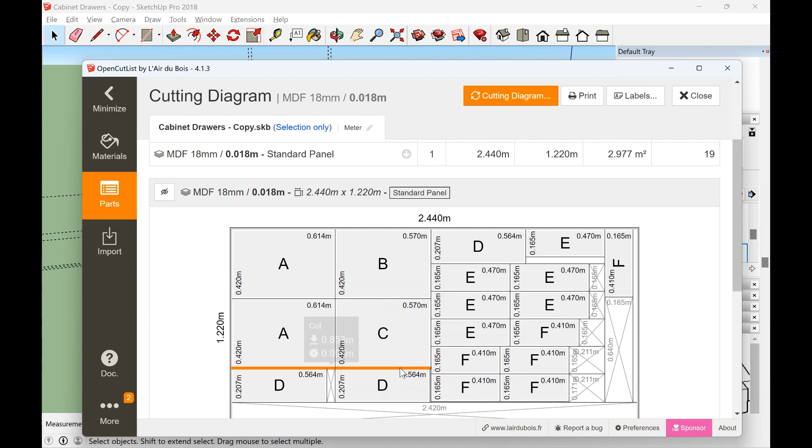And then the labels thing, this is even better, because of course you're going to have lots of pieces of timber that are going to look very similar. So what you can actually do is have a label for each individual item on here, print it off, and then stick it to it. So as you cut them, you know what's what. Just absolutely brilliant.

Okay, and then you can print them off, of course - print off your cutting diagram. You know exactly what you're doing. Just cut it to that size, and that's it. I've actually worked it out, guys - this is actually capable of using offcuts. It's a brilliant, brilliant bit of kit.

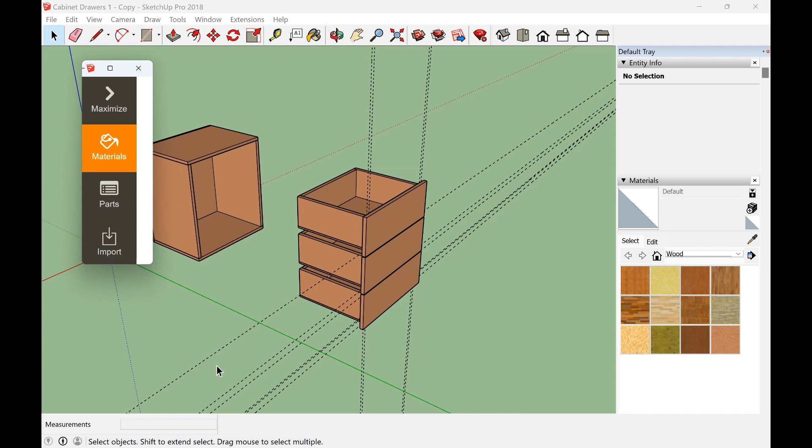So if we go into MDF 18, I've put some different sizes in there, you'll see. But then when you come to the parts, as I showed you, we've got MDF 18 - let's go down here, go to cutting diagram, and we can choose the different sizes. Now, you could use a full sheet, and then you can put your offcuts in here. So let's say I have some weird size, 1073 by 580mm, and then you have to put the quantity as well, times 1.

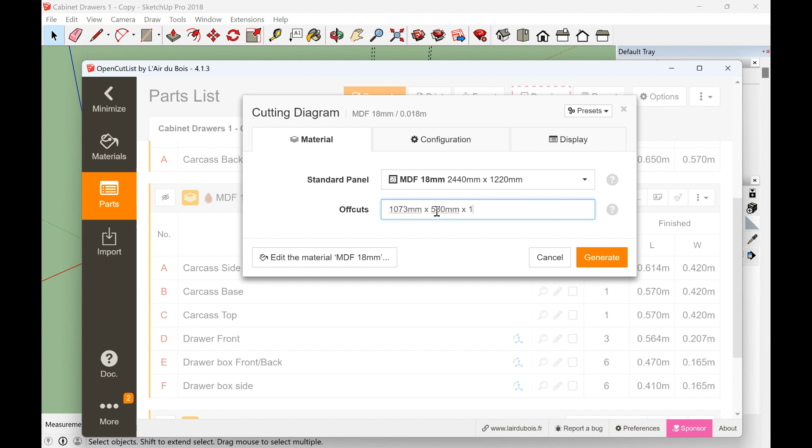All right, so it's added that - generate. So it's actually listed there as the offcut, and it's got the offcut here. So it's using the offcut, and then it's using the full sheet as well. So whatever material you have, you can use this. It's brilliant - you don't waste anything.

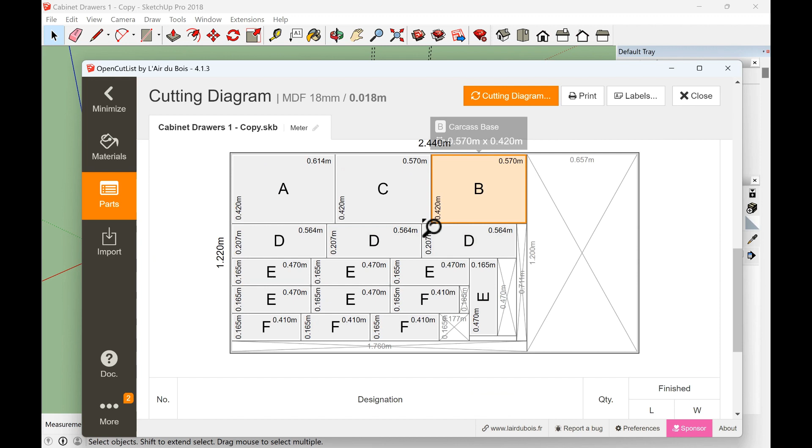Fantastic. Right, I hope that was clear for you. Like I say, anyway, I'm going to go down, see what I've got. I'm going to plug those figures into this, print off my own cutting list, and then we can get started with cutting the material.